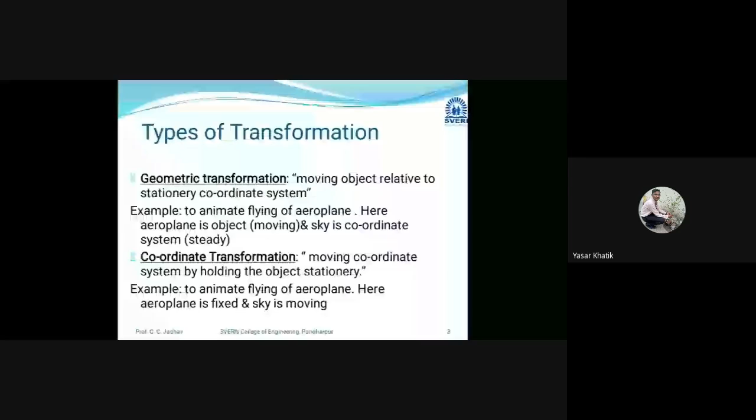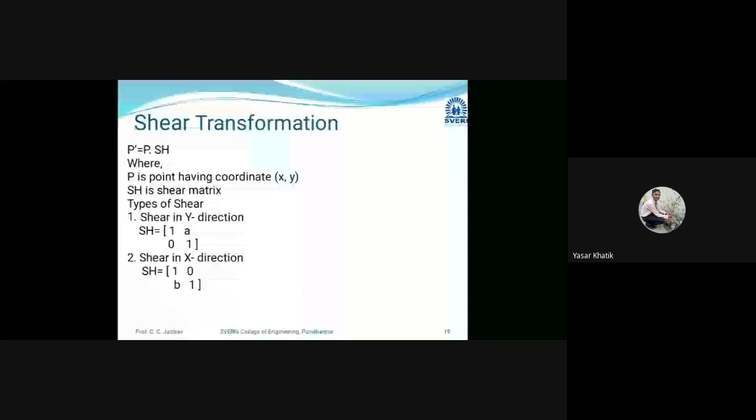So already we have covered the first part of the second chapter, that is the geometric transformation. In that we have seen the simple problem on the translation, rotation, mirror, scale. So already we have covered the second important part, that is the homogeneous coordinate transformation. And basically in university examination they will ask one definite fixed question on this point for 7 marks.

So we have already covered the homogeneous coordinate transformation, a theory part as well as a problematic part. So we have seen a simple problem as well as a homogeneous problem also. So if anyone is having any doubt regarding this problem, you can ask me anytime. You can call me, you can message me on the WhatsApp, so I will clear your doubts. Okay.

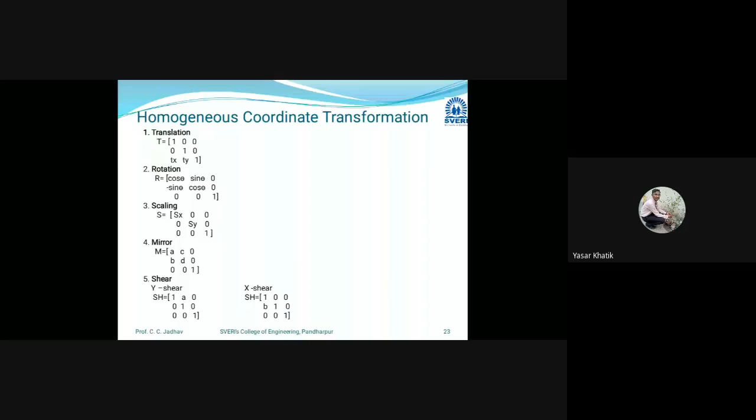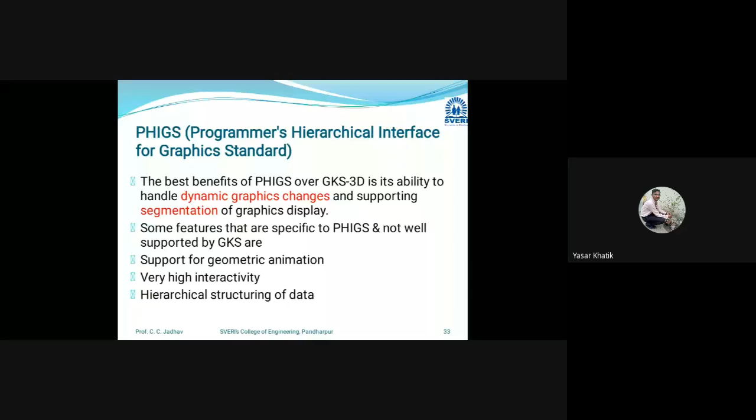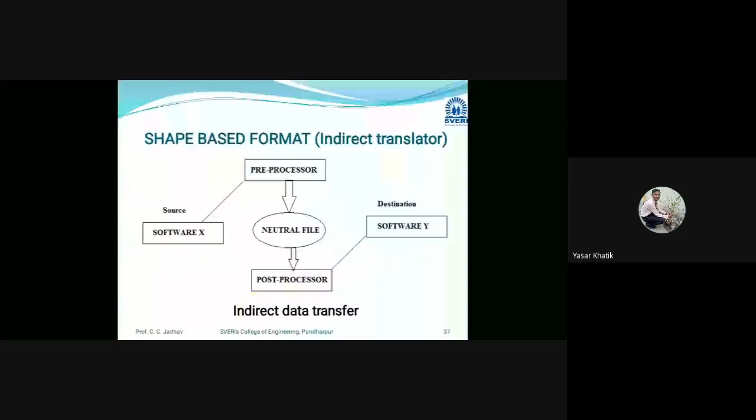Then we have seen windowing, viewing function, coordinate, then standardization. What are the functions of the graphic system? Then various graphic standards for this graphic system, GKS, PHIGS, IGES. Then last is data exchange with direct form and indirect form. So we will see next part. So that is our main second part of this chapter, that is an introduction to the geometric modeling.

Okay. So what is meant by geometric modeling? Might be everyone knows about the modeling. I think in second year you have learned the CATIA software. So everyone knows the meaning of the modeling. Modeling, in that we are going to create one of the product parts, like the prototype.

So earlier CAD systems, means far before our era, were basically automated drafting systems which displayed a two-dimensional representation of the object being designed. By using such a system, the drafting process could be accomplished in less time, and the productivity of the designer could be improved. Okay, so with the new CAD systems we are going to design a prototype model, and in that model we are going to create the drafting part.

We are going to achieve different parameters within less time by using this latest CAD system. Okay, but in the previous, old method for designing any product, they were using the old system. Here they were using a drafter, pencil, whatever instrument is there, and that instrument will take a long time for designing any product, and it is quite difficult to find out all the details of that model, as compared to our new CAD system.

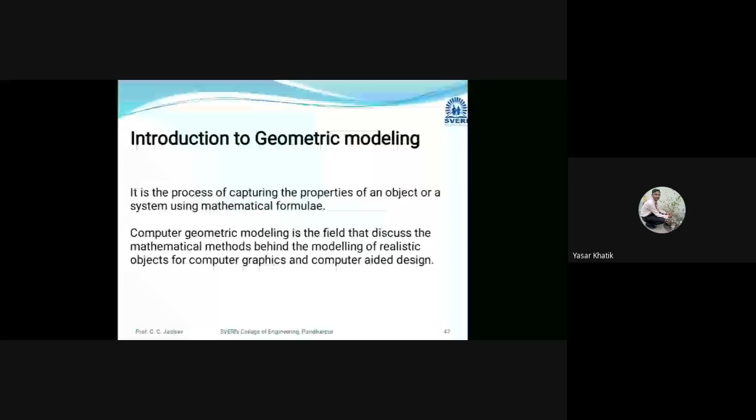We'll start with the first, that is wireframe modeling. Wireframe modeling is nothing but simple wire. Its name indicates wire; it is structured only like wire. It has no surface, no solid part. It is just a process of visualization of a three-dimensional part by using 3D computer graphics. We are not going to show any surface or volumetric area in this modeling. We view the skeleton and edge representation of the real-world 3D object using different elements: points, lines and curves.

So this is the basic type of modeling; here we are just showing the skeleton representation. This is the first type of modeling, wireframe modeling. Here we introduce vertices, which have some coordinates, and edges, which we call elements. Two vertices form a single element. Like this we form different vertices, and by using these vertices we create elements, that is, the edges. So we just show how the product will look in skeleton format.

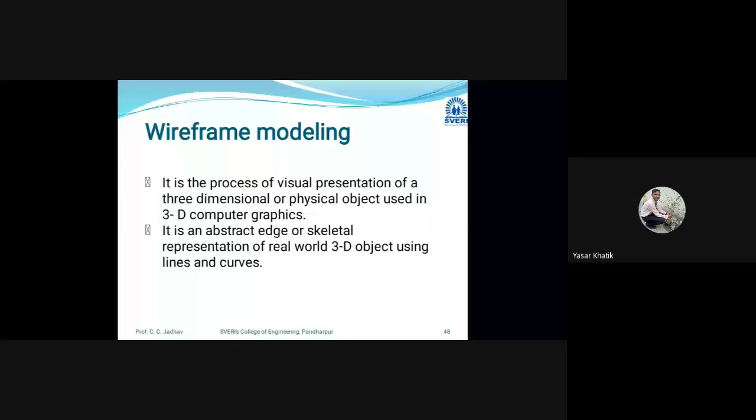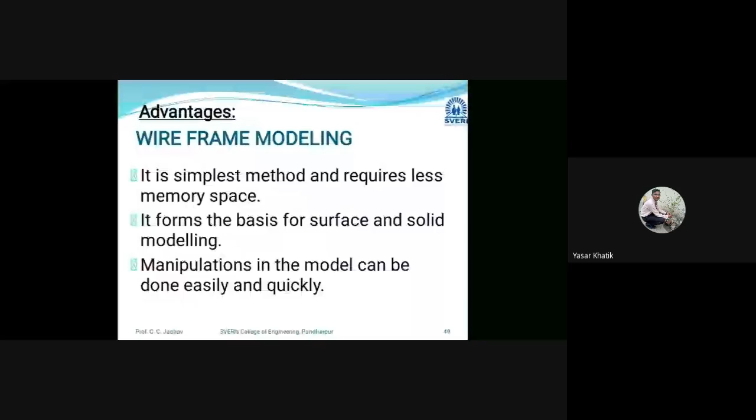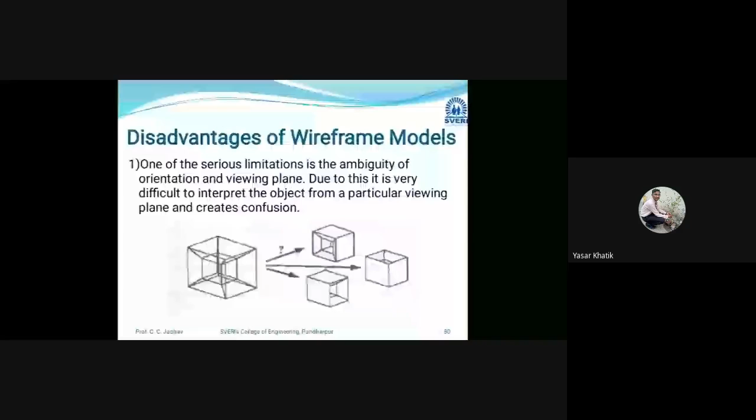It is the simplest method and it requires less data. It forms the basis for surface and solid modeling. If I want to do some modification or manipulation, it will be easy and quick. Those are the advantages of the wireframe model. There are some disadvantages, or drawbacks. We cannot set orientation as a point of view for the next drawing, so that is a limitation of wireframe.

Then, regarding information on surfaces: if I want to create some curves or entities at the nodes, at the surfaces, at the corners, that will be a critical task in wireframe. It is unable to calculate mass or physical quantities, and there are no surfaces, so at the time of assembly it will create some problems.

And as compared to solid and surface, wireframe requires a lot of data to create the construction model, it is not actually a solid part, and it is complex to draw. So this is about wireframe modeling, the first type of geometric modeling.

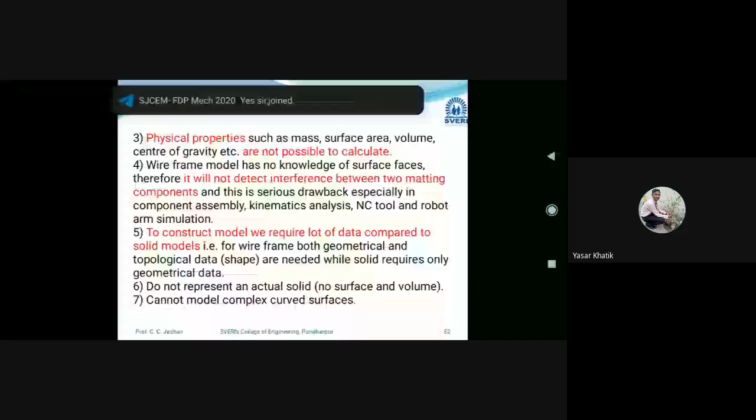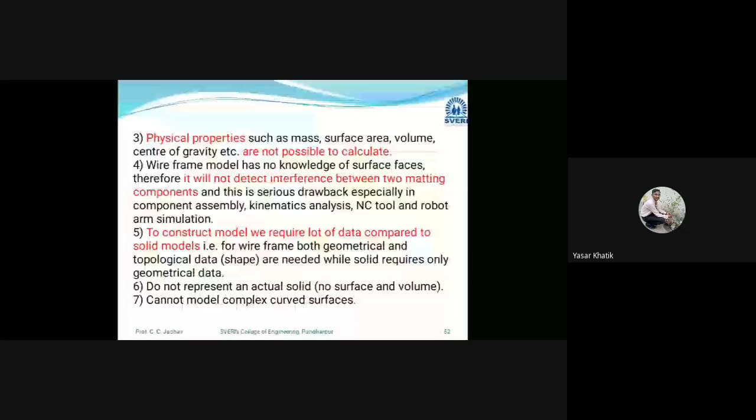The next type of geometric modeling is surface modeling. The name itself indicates surface modeling, so we are going to create a surface. In surface modeling, objects are defined by their boundary faces. Bounding faces means we join the vertices with edges and surfaces, so it will create a new surface.

So a surface model is a set of faces. We join the different faces with different edges and vertices, and that creates one entity. A surface model consists of wireframe entities that form the basis to create the surface entity. In the previous modeling, we have seen that we create only a wireframe model.

Okay, and by using that wireframe model, we are going to join only that particular face by using these vertices, and that will create our surface. So at the time of surface modeling, we are going to use the previous wireframe model. That will act as our basis, meaning our foundation for creating any surfaces. So the wireframe model is also important for drawing any surface model.

A surface model consists of wireframe entities that form the basis to create surface entities. In general, a wireframe model can be extracted from a surface model by deleting or blanking all surface entities.

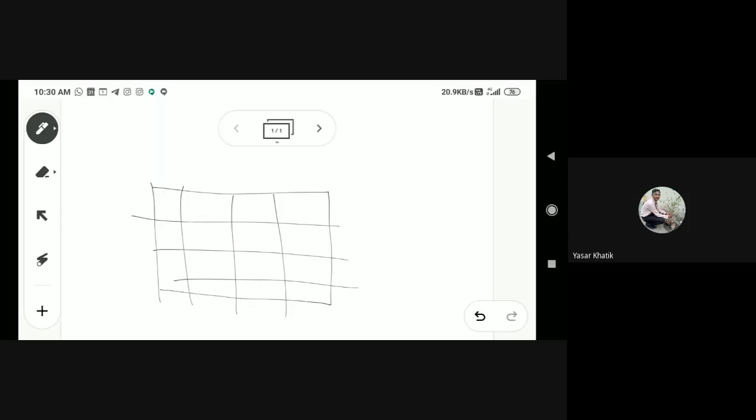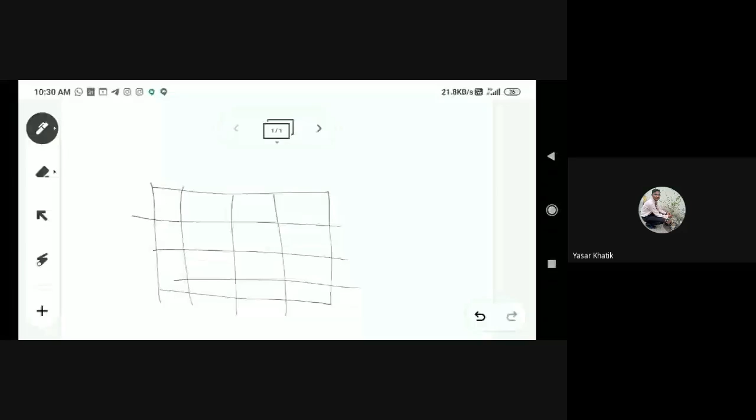I am going to divide this with a net-like structure. This is our plane structure. This is the simplest surface. It requires 3 non-coincident points to define an infinite plane. So here you require just the 3 non-coincident points, and you define the infinite plane. So this is the first type, that is the plane surface.

Next, the second surface is the ruled surface. A ruled surface is a linear surface. It interpolates linearly between two boundary curves that define the surface, and these can be any wireframe entity, and this entity is ideal to represent surfaces that do not have any twist or kinks.

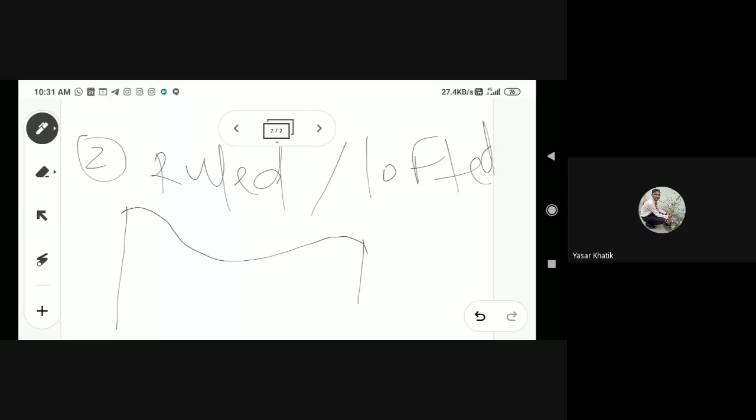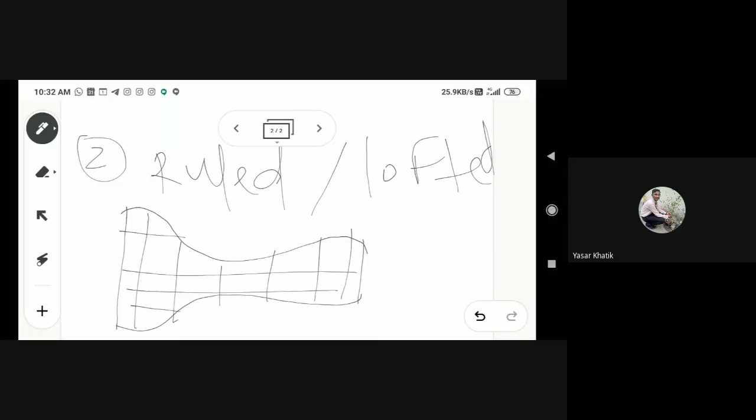So ruled means, suppose I have this one line and I have this second line. I want to create a surface with a ruled profile. The previous one is straight, a plane with only plane surfaces, but I want to create a ruled one, which we can call lofted. So like this, I am creating the ruled surface. Like this, we can create any ruled surface or lofted surface. You can name it ruled or lofted.

The third one is the surface of revolution. You might have studied this in CATIA software. Suppose I want to create one entity by using an axis. We just draw one axis, draw the symmetrical part along that axis, and then revolve it about this axis. Then you will get the whole geometry by using this command. This is called the surface of revolution.

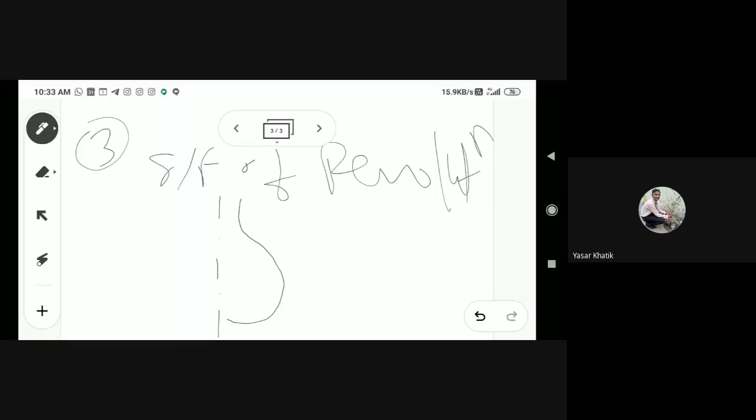Like this, I want to create one entity. Before that, I create one axis, and around this axis I am going to create one drawing. This is a planar curve. By using this entity, I am going to create one model, just like using the sweep command in CATIA. We select the axisymmetric surface around that axis, so it will revolve about that axis and create the geometry. So this is about the surface of revolution.

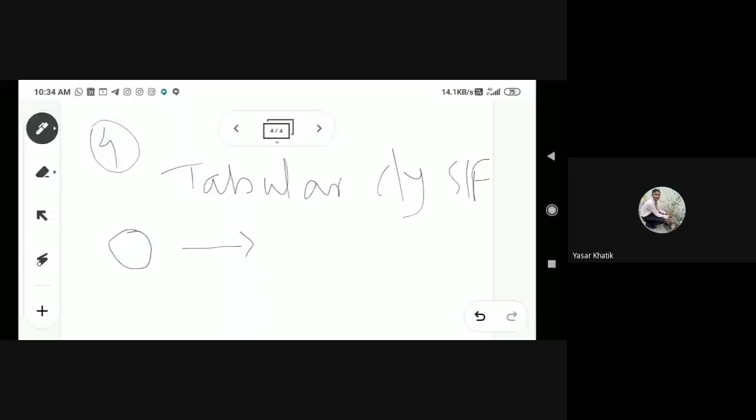The next surface, number 4, is called the tabulated cylinder surface. This is a surface generated by translating a planar curve a certain distance along a specified direction. It is a simple type of surface where, suppose I take this circle and want to create a cylindrical part from it, you can use the tabulated cylinder surface. You can extend that circular part with this command and create a cylinder. So from this circle I am going to create one tabulated cylinder like this.

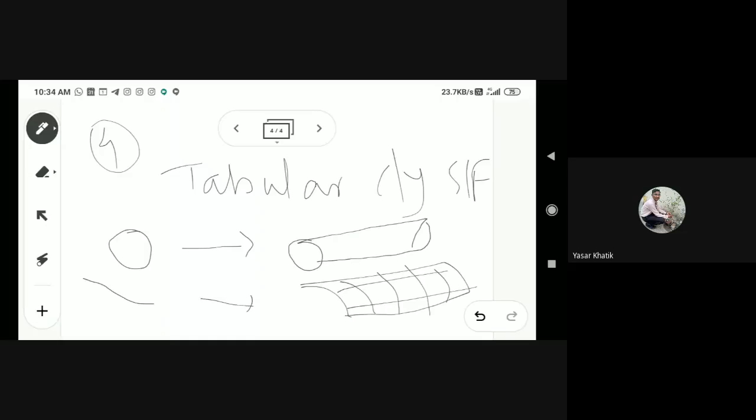So this is the tabulated cylinder surface. Next, suppose this is one line and I want to create a tabulated one. You can just create a surface like this. So this is the example of the fourth type of surface, the tabulated cylinder surface. Then next, the fifth is called the Bezier surface.

Okay, so this is the surface that approximates given input data.

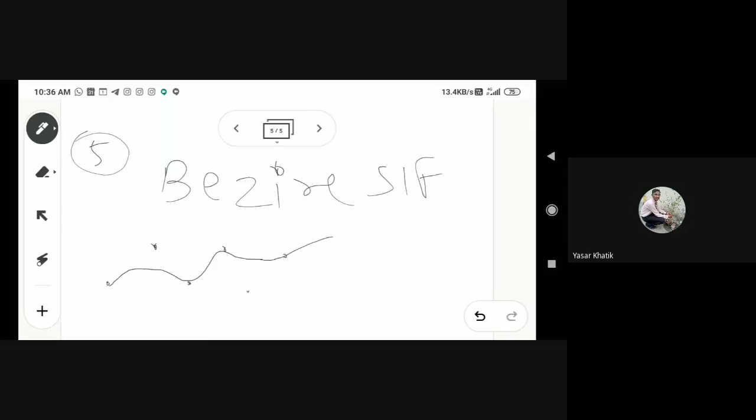Okay, so the next surface is B-spline surfaces, number 6, B-spline surface. So this is the surface that can approximate or interpolate given point data. It is a synthetic surface. It is a general surface like a Bezier surface, but permitting local control of the surfaces. Okay, so in the previous surfaces, that is the Bezier surfaces, there is no local control, only the global control is there. But in this B-spline surface, local control is permitted.

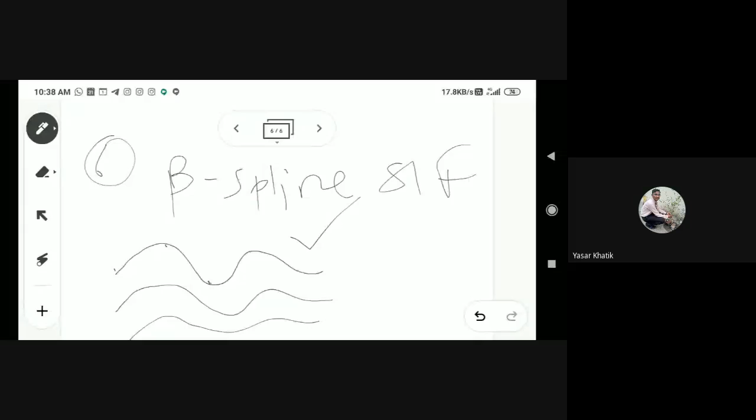Okay, so local control and global, I will show the example. So suppose these are some points, and this is the curve passing through these points. Okay, that is called the B-spline surface. Okay, so this is the B-spline curve. Suppose I want to change the nature of the curve for this first B-spline surface. Suppose this is your previous B-spline curve, and I want to change it. Like this, I will take the same points.

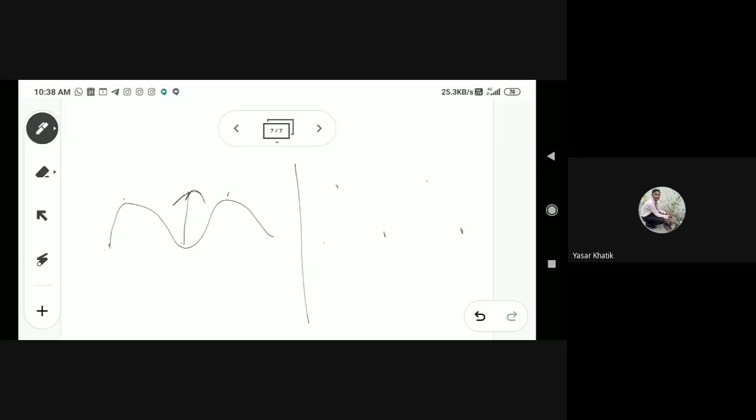I want to change this point to this location. Okay, I will drag this curve to the upper side by using local control. So this point is called a control point. This point is called control point P1, P2, P3, P4, and P5. So generally we call it a local control point. So in B-spline surfaces, we can easily control the local points. With the help of that local point, we can create or change the nature of the curve.

Okay, and then I want to change the nature of that curve at point 3. So look, I will create a curve with a new point. So this is your P1, P2, P3, P4, and P5. So I want to change our curve nature at point P3 by using local control point P3. Okay, so that will be permitted in the B-spline surfaces, but in the previous Bezier curve, that is not permitted. Okay, so this is the difference between Bezier surfaces and B-spline surfaces.

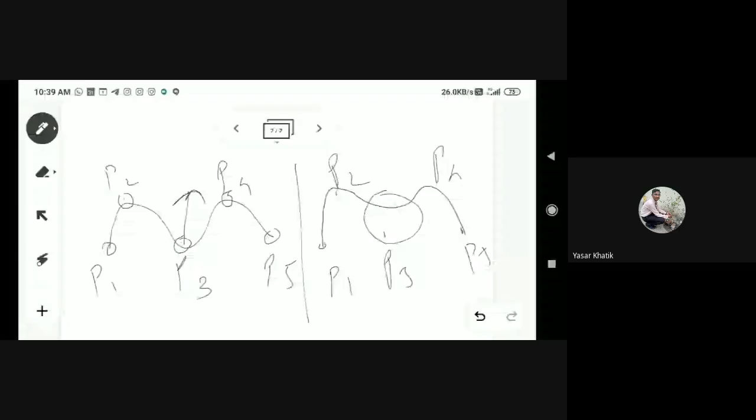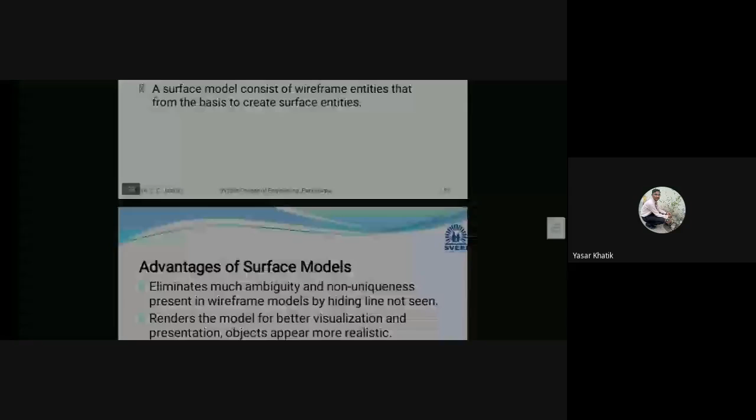Okay, so these are the types of surface modeling. So for surface modeling, we will go to our PPT. Okay, so we have seen the types of surface modeling. So what are the advantages of the surface model? So basically surface models eliminate much ambiguity and non-uniqueness present in the wireframe model by hiding the lines not seen. Okay, so whatever the drawbacks, the ambiguity, the difficulties in a wireframe model, we are going to eliminate them in the surface models.

Okay, so it renders the model for better visualization. Render is one of the tools for improving the surface finishing or visualization in the modeling. And presentation objects appear more realistic. So by using the wireframe model as a foundation, we are going to create surfaces. So for better visualization, we are going to apply some rendering surface finishing on those surfaces, so that the object looks like a realistic product in terms of the surface modeling.

So it provides the surface geometry for computer aided manufacturing. So in CAM we are going to create an actual product, so they provide the surface geometry for CAM for manufacturing purposes.

NC, that is numerical control machines for further production. So it is quite a good point related to direct production. There is no other CAD system procedure required for that particular part, for further manufacturing.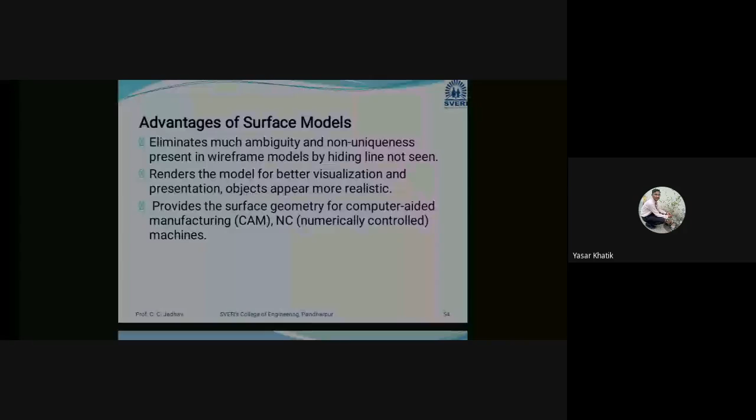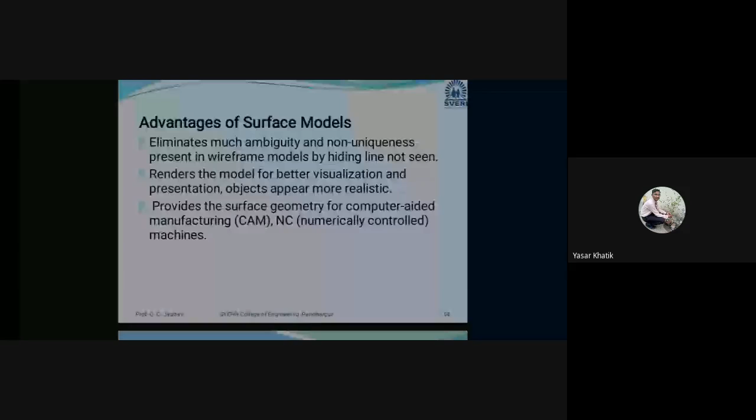In surface modeling, we eliminate the drawbacks in wireframe - that is its most important advantage. By using surface modeling rendering, we show better visualization of the product object. It looks realistic, and it is quite easy to give that surface geometry direct to CAM and NC machines for the next process. So those are the advantages of the surface modeling part.

It provides the geometry needed by the manufacturing engineer for mold and die design. So whatever the design engineer or manufacturing engineer needs for further production, it will be needed for making the die design mold for that particular product. So that is also a benefit.

It can be used to design and analyze complex free-formed surfaces of ship hulls, airplanes, fuselages, and car bodies. Whatever complex geometry is present in airplanes, fuselages, car bodies, ships - that complex design and analysis will be created and analyzed in surface modeling using various surfaces. We have already seen different types of surfaces like plane surfaces, ruled surfaces, tabulated, Bezier, B-spline - different surfaces used for complex geometry, making it easier to create different parts. So that is also a benefit.

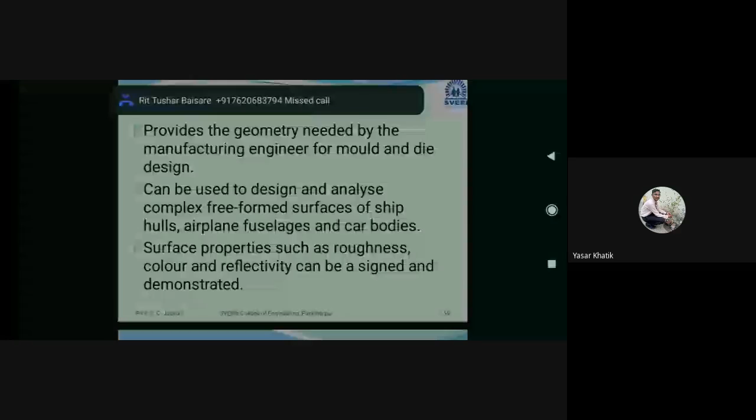Surface properties such as roughness, color, reflectivity can be assigned and demonstrated. Surface has a lot of properties. First is roughness, meaning we present the surface of the particular part with a certain grade - we have already studied this in machine drawing. There is color, reflectivity, and many other parameters to show that surface, and these will also be demonstrated using this surface modeling.

Then there are some disadvantages regarding surface modeling. It provides no information about the inside of the object. In the previous wireframe model, we saw there is no physical data in terms of area, mass, volume, or any properties information - they are not stored because it is only a construction model. In surface modeling, we create a surface by vertices and edges, but inside the part there is no object - there is no information regarding that particular part. By using this surface model, we create only surfaces, and inside these surfaces there is no information about that particular model. So that is a drawback.

For curved surfaces, a fine mesh is needed to be accurate. Whatever curved structure or complex geometry is there, a fine mesh is required for accuracy and better results. If we create a coarse mesh, mesh quality is poor, and if we create a fine mesh, by default the computer system requires large memory and more computational time, which indicates lower productivity of the company. So it is quite difficult to create curved surfaces, and for that we need to make a fine mesh.

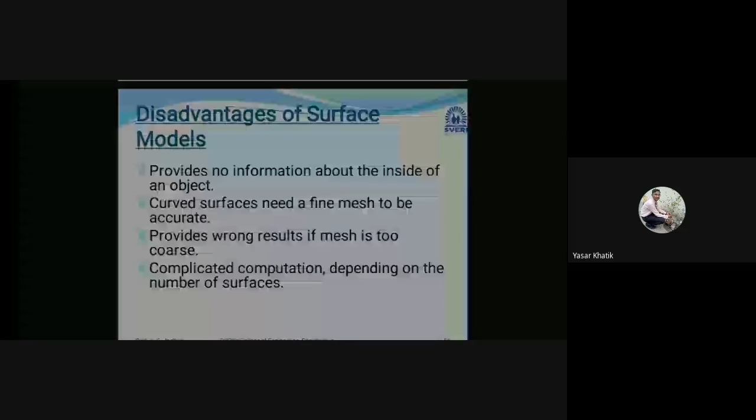Next, whatever we have already seen, the different surfaces are there, like plane surfaces, ruled surfaces, sphere, cone, tabulated, bezier, B-spline, Gordon, NURBS. So these are some types of surfaces: analytical surfaces and synthetic surfaces. Bezier surfaces, B-spline, NURBS, that is categorized into synthetic surfaces. We will see the details of curves in the last point of this chapter. This is only the introduction part of surfaces.

Here we are going to use different types of surfaces. Whatever complex geometry is there, for that purpose we are going to use these curves for a better product. So we can easily construct complex geometry by using these synthetic surfaces and analytical surfaces. So this is the point about the kinds of surfaces.

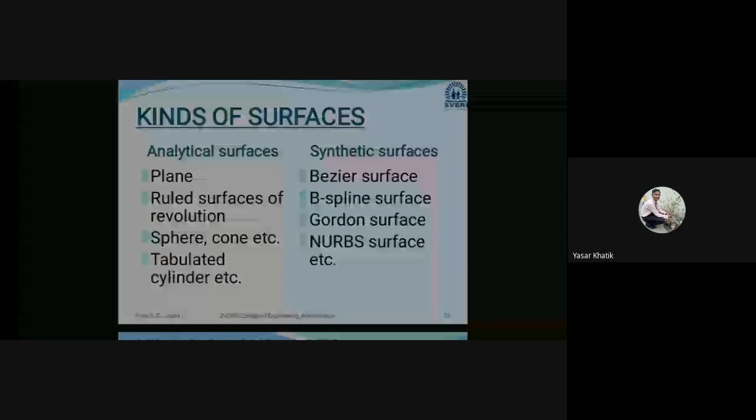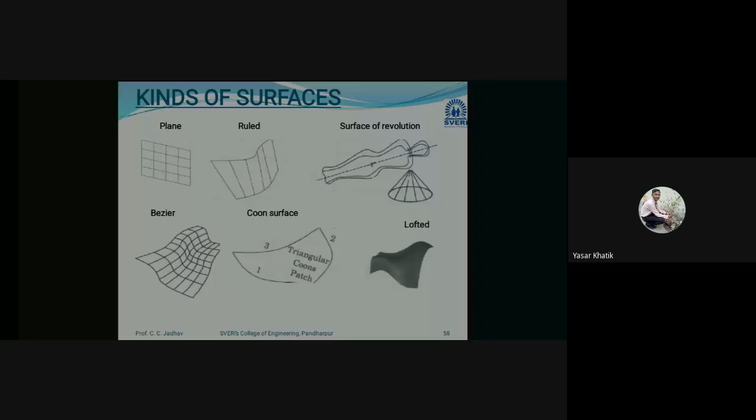Now, as already shown, plane surfaces, ruled surfaces, then surface of revolution - how we are going to create a geometry by using the axis. About that axis we create a symmetrical part of that geometry, and then we revolve about that axis and get a geometry. Then Bezier curve, Coons surfaces, lofted surfaces.

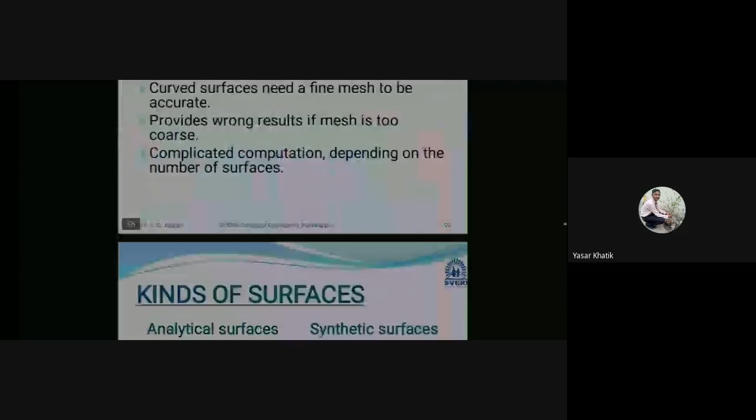So if you have any doubt regarding surface modeling, you can ask me, if you do not understand what surface modeling is.

Previously we have seen wireframe modeling, now we have seen surface modeling. In wireframe modeling, we are unable to store physical data in terms of mass, volume, area. So in surface modeling we are going to eliminate that previous drawback of the wireframe model.

We have created surfaces by using the vertices and edges in surface modeling. But in surface modeling, one major disadvantage is that inside these surfaces there is no information regarding that particular object. So that is the major disadvantage of surface modeling.

But one good advantage of surface modeling is we can create any complex part of the geometry by using analytical and synthetic curves, and that will represent that entity. Using rendering tools, you can create a physical visualization for that particular part, and we will get a better visualization, like an aesthetic look and ergonomic look, so the customer will buy our product. So that is the advantages and disadvantages of surface modeling.

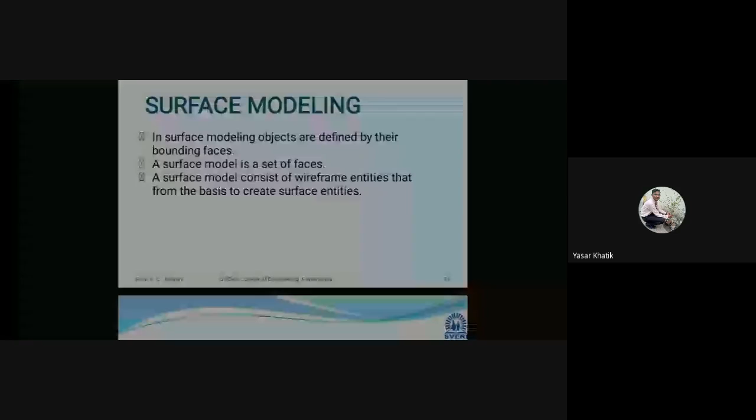We have seen the types of surfaces - plane, ruled, sphere. For that particular condition we have to use these different analytical surfaces as well as synthetic surfaces. If our geometry is complex, then we are going to use synthetic surfaces. So like this, we have seen surface modeling.

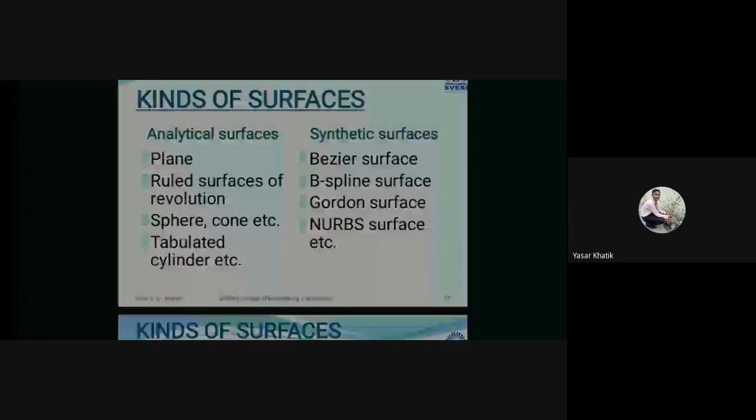So the next part of this geometric modeling is solid modeling. We have seen wireframe modeling, then surface modeling, and last one is solid modeling. First we create a wireframe model, and by using this wireframe modeling we can easily form a surface using different vertices. And last, using different surfaces, we create a whole solid part of that particular model.

So solid model is nothing but a solid definition that eliminates all kinds of ambiguity, whatever difficulties or drawbacks we faced in wireframe model and surface model. Those difficulties, that ambiguity, we are going to eliminate in this solid model.

In representing objects, the solid modeler was developed. Out of the various approaches developed, one of them was an approach to design mechanical parts by treating them as a combination of simple building blocks like cylinders, cubes, cones. So whatever drawbacks we faced in wireframe and surface modeling are eliminated in solid modeling. We create a simple solid by using a combination of blocks like cylinders, and you might remember in CAD software and CATIA software there is one option called primitives, a toolbar.

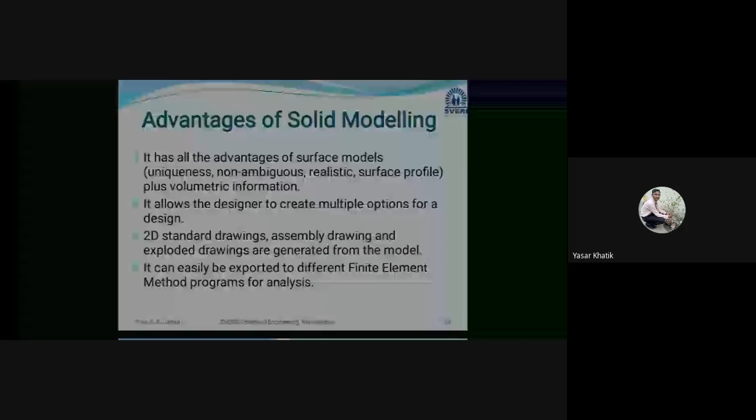Next, it can be used in newly developed manufacturing techniques, like computer integrated manufacturing, computer aided manufacturing, and design for manufacturability. Whatever new techniques are coming for manufacturing purposes, we can easily use this solid model part for our new techniques, importing it directly into the CAM system.

Here we are going to integrate all the departments at a single point, meaning CAD department, CAM department, and CAE department, and we are going to carry out the production of that particular part using these different departments at a single point. That is called concurrent engineering.

So you might be studying in first year in mechanics. What is meant by concurrent forces? All forces coming at a single point. Like this, we are going to create a model, create a particular part using the CIM manufacturing technology, that is, computer integrated manufacturing. Here we allow all departments to come together at a single point. That will save our time as well as increase our productivity. So CIM is important for a particular model.

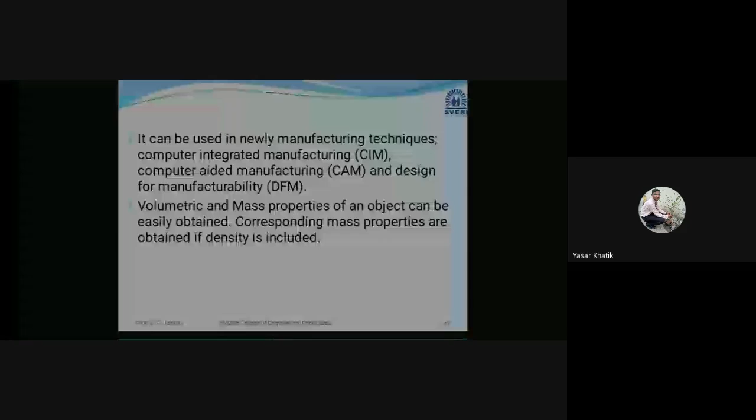Now we will see some disadvantages of solid modeling. First, it is more intensive computation than wireframe and surface modeling. Of course, in solid modeling there is a lot of data for that particular model, so it will take more computational time during analysis compared to the surface and wireframe models.

In wireframe there are only edges, lines, and curves. In surface modeling only the surface is there, but in solid modeling there are lines, vertices, surfaces, the solid part, then the physical properties of that particular model. So that will take a huge computational time. That is the main disadvantage of any solid modeling analysis. But it will give better accuracy compared to the wireframe and surface models.

The second thing is it requires more powerful computers, faster and with more memory, for the analysis.

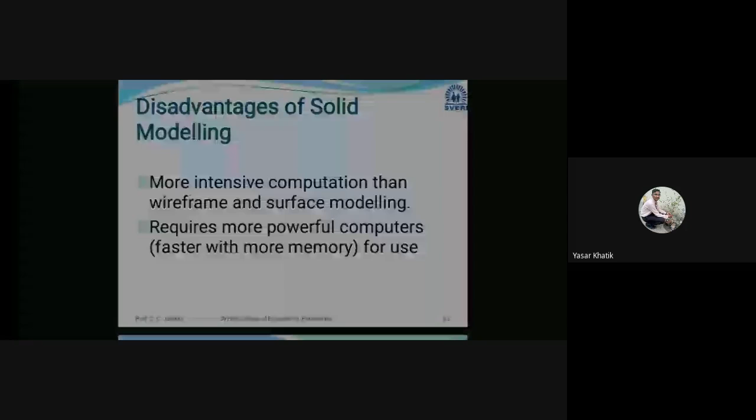So the next point is a differentiation of these three models: wireframe, surface, and solid. Whatever we have studied up till now: what is meant by modeling, geometric modeling, and its three types, wireframe, surface, solid. What is the use of wireframe? What is the use of surface and solid modeling? What are the advantages and disadvantages of each? On this single slide, we will conclude these three models.

Okay, so I'll just ensure. Hello, Aniket. Yeah, sir.

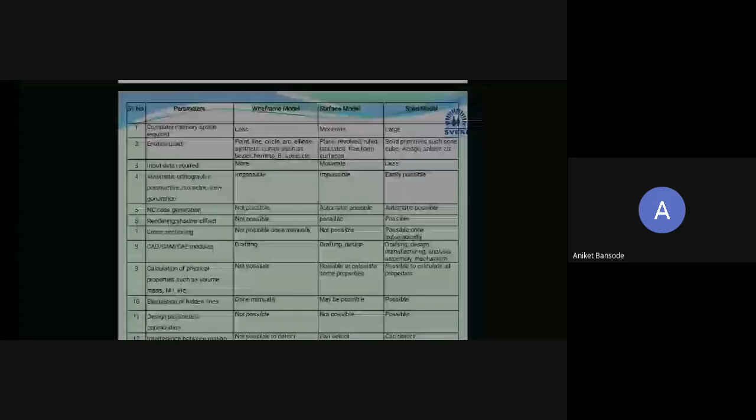Next is the entities used. In the wireframe model, the entities we use are point, line, circle, ellipse, and synthetic curves such as Bezier, Hermite, and B-spline. Those are the entities for drawing a wireframe model.

In the surface model, we have already seen the types of surfaces: plane, ruled, revolved, tabulated, free-form surfaces, and synthetic curves like B-spline and Bezier. Okay, and the solid model.

So directly we are going to use primitives, and that is the one thing. Then you can use the wedge, sphere, cubes. Okay, and then you can use various tools; you can use here a line also, a point also, and from that line and point you can create any solid part. That is also possible, but that will take a long time.

Okay. Third parameter, that is the input data required. So for a wireframe, we require a large amount of data for creating the wireframe, every vertex, every edge's information. So as compared to surface and solid model, we require huge input data in the wireframe model, moderate in surface, and less for solid.

Automatic orthographic, perspective, isometric view generation. That is the next parameter. In wireframe, it is impossible to create these views. In surface model also it is impossible, but in solid model you can easily create them by using the views command. You can create any views.

So for a representation of any solid model, there are some schemes. First is CSG, that is constructive solid geometry, the solid primitives combined with Boolean operations. Means we are going to combine the cone, sphere, with the Boolean operations, means addition, subtraction, like this. This is the first type of representation.

Second, boundary representation, that is B-rep, that means bounding faces, edges and vertices. And third is cell decomposition, means we are going to add some part of the component model with the other part, that is variable spatial cells. In that there are two types: spatial occupancy enumeration, that means model of fixed size, and next octree encoding.

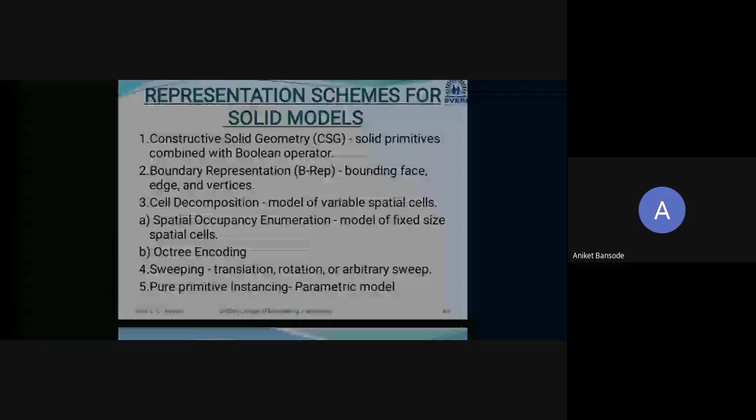And fourth one is sweeping, like translation, rotation, and arbitrary sweep. You can sweep in terms of global coordinates. And last one is pure primitive instancing, parametric model. So these are some schemes for representing the solid model. We are not going to see all of this, just 2 or 3 parts. So we'll start from the first, that is the constructive solid geometry scheme.

Now you can see some examples of the basic primitives for solid modeling. In primitives or entities, there are some ready-made models, like box, cylinder, cone, wedge, sphere, and torus. You just have to select any required entity and place it on the plane, and that will create the geometry according to your dimensions. So this is the first type, constructive solid geometry.

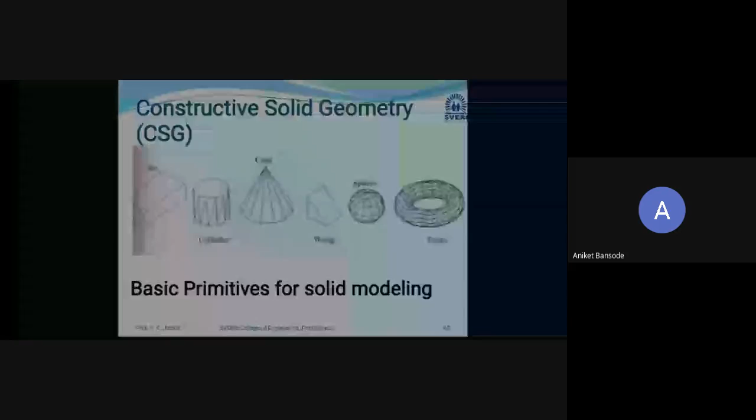Next, for constructive solid geometry, there are some Boolean operations. The first Boolean operation is union. Union means we are going to add the surfaces to each other. In that we sum up all points in each of the two defined sets. That is a logical operation, also referred to as add, combine, join, and merge.

Already you might know in CAD there is a union option, join, and cut also. So there are two entities. You can see one square box, select A and B, and there is a union operation, A union B. So we will get our required geometry by using this Boolean operation. So this is the first, union.

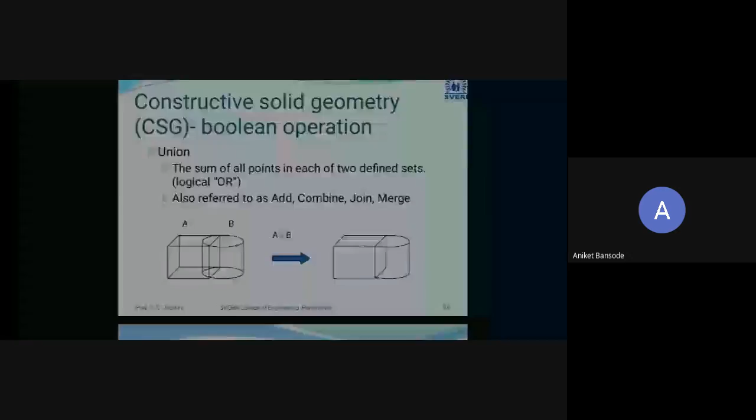And the third operation is intersection, means common and conjoin. Whatever the combined part of these two entities is, that is our solution of this Boolean operation. So those points common to each of the two defined sets. The sets must share a common volume.

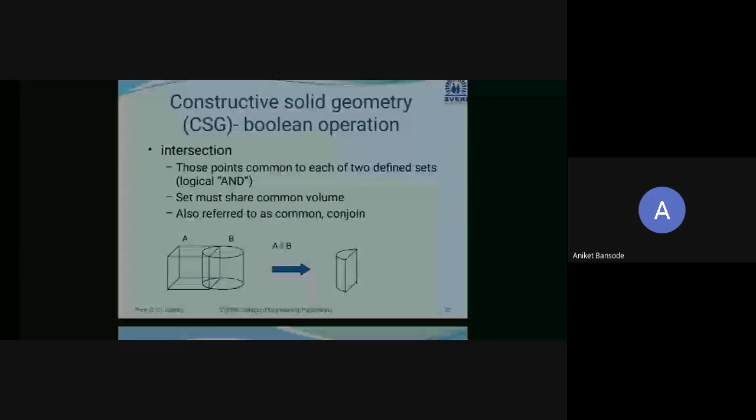And it is also referred to as common, conjoin Boolean operation. You can call it common and intersection. So this is about constructive solid geometry and the Boolean operations. So next part is Boolean operation. Using Boolean operations, be careful to avoid situations that do not result in a valid solid.

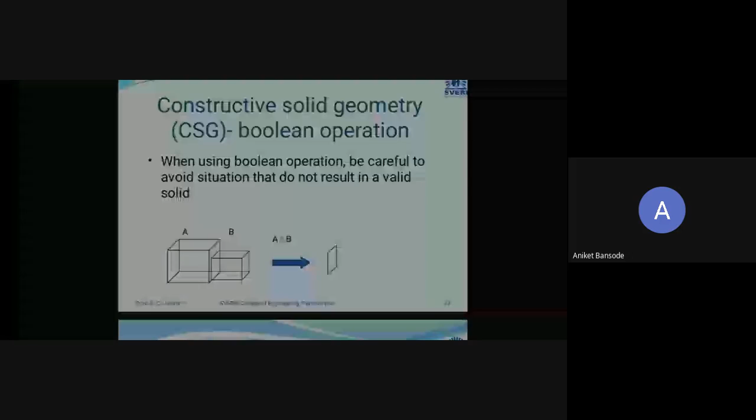Then next, these are the Boolean operation results. First of all is union, if you want to add any other entity to a different entity, then subtraction, then intersection. Okay, so this is the example of the three types of Boolean operation: union, subtraction, and intersection. Okay.

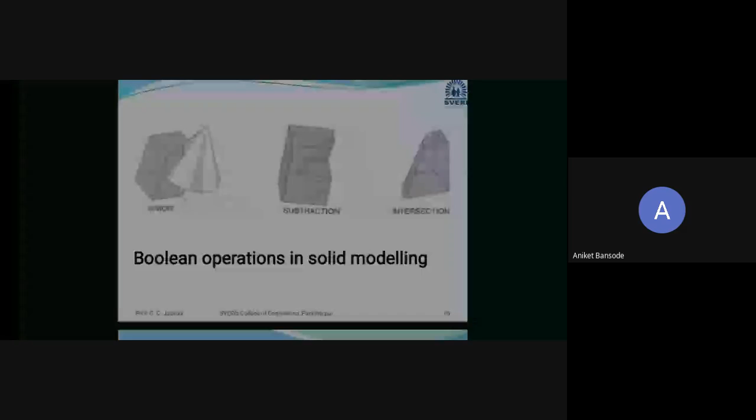Now you can observe there are so many parts here we are combining, joining, union, whatever Boolean operation is there. We are using the different Boolean operations and we are forming a required part. Okay, so like this we have to do different operations and then we will get the required part.

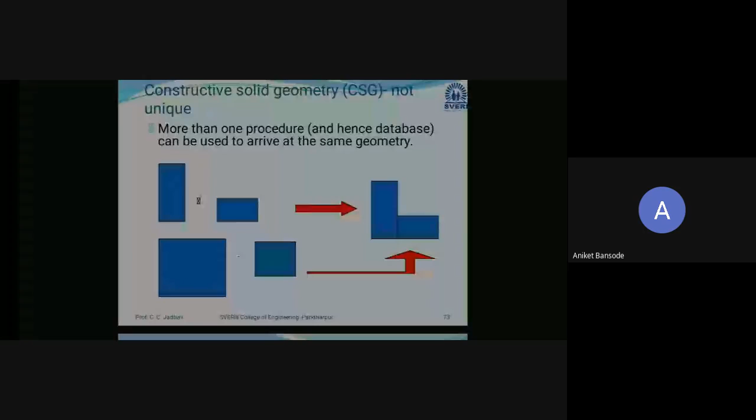Then you can see here, this is the second example. Here different parts are there, and from the different parts we are going to create a geometry. Okay, so more than one procedure and hence database can be used to arrive at the same geometry.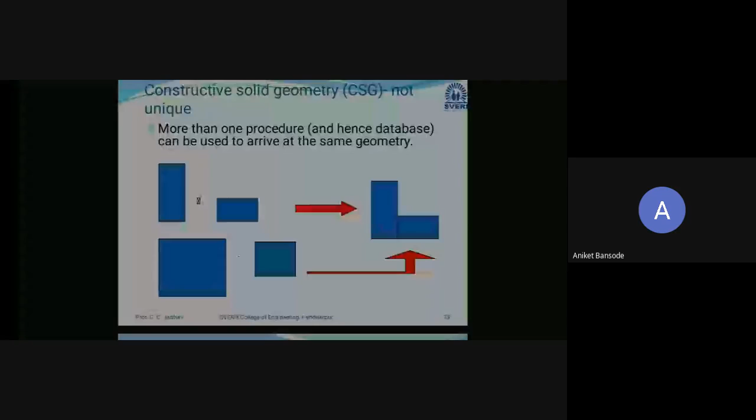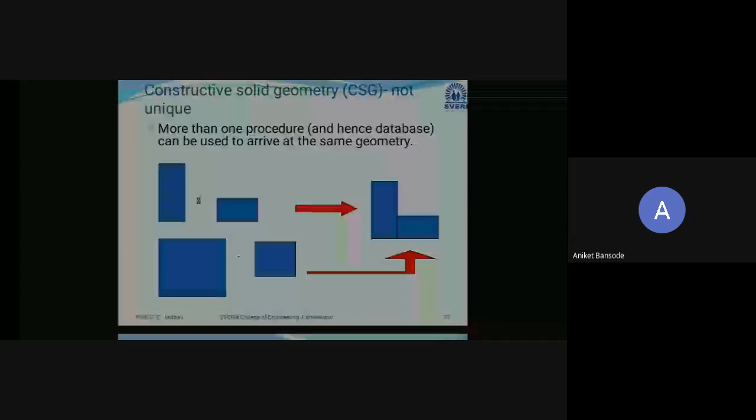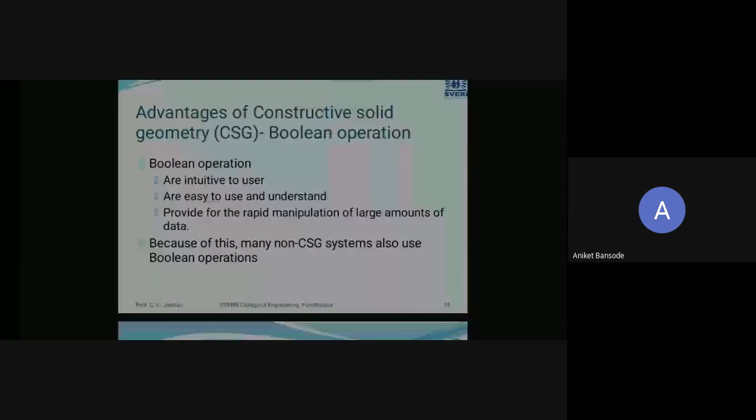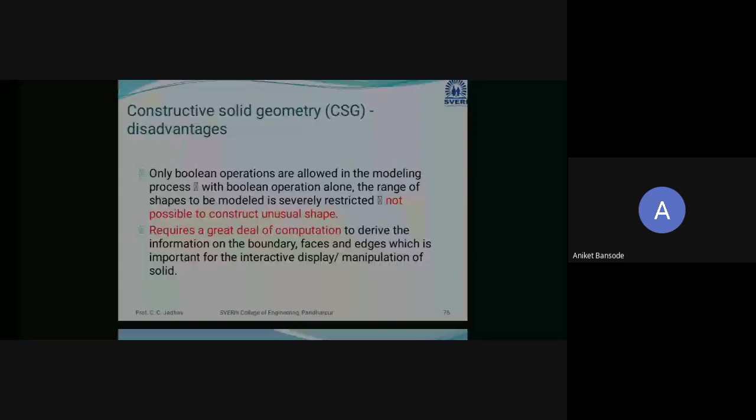So there are some disadvantages of CSG. Only Boolean operations are allowed in modeling processes. With the Boolean operation alone, the range of shapes to be modeled is severely restricted; it's not possible to construct unusual shapes.

Previously we have seen that there are some primitive shapes like sphere, cone, circle, cylinder, like this. Only a few primitives are there. Other than these, if you want to create any shapes, that is quite difficult or not possible to construct.

Okay, so those are the main disadvantages. It requires a great deal of computation to derive the information of the boundary, faces, and edges, which is important for the interactive display and manipulation of the solid. In solid modeling, if you want to create a geometry by using constructive solid geometry, it requires a great computation to achieve the information at the location of the boundary, faces of that model, and edges. That is quite a difficult part in this CSG.

So it is important for the interaction between user and the display at the time of designing the model, at the time of analyzing that model. The user should be able to see each and every detail of that model in terms of the edges, faces, and boundary information. That will be required for further analysis. So those are the disadvantages of this CSG.

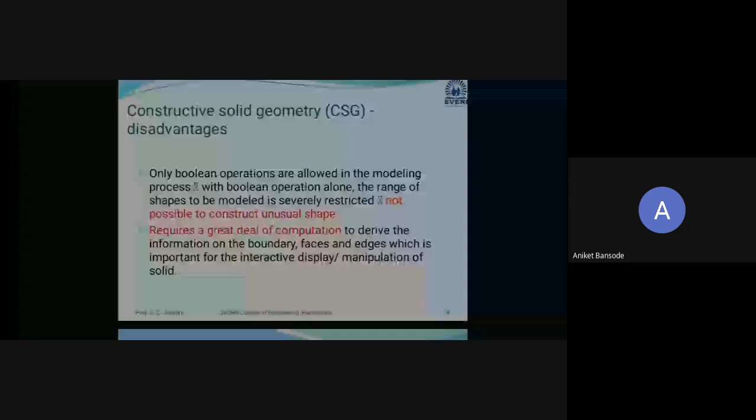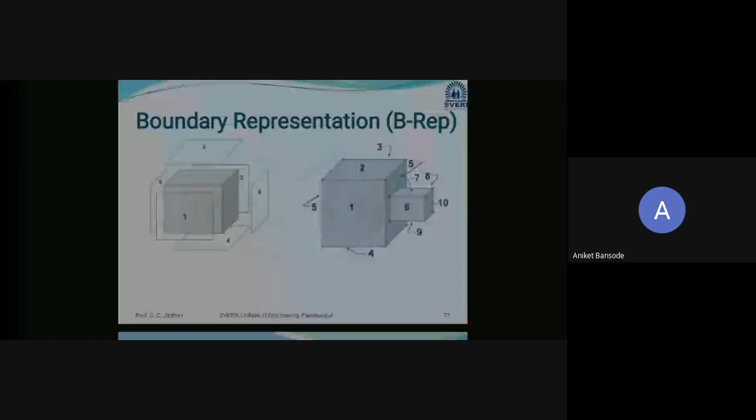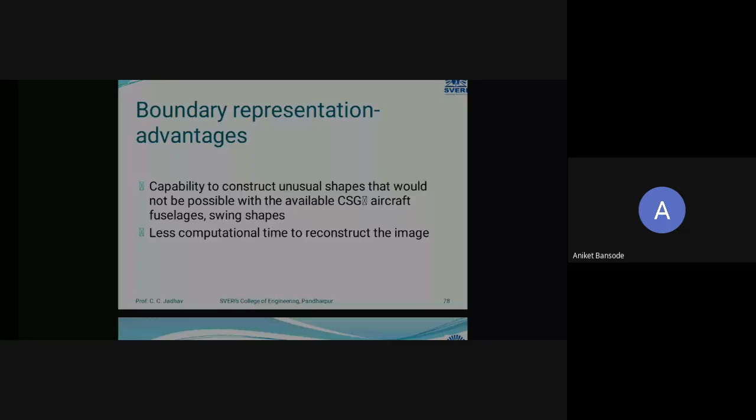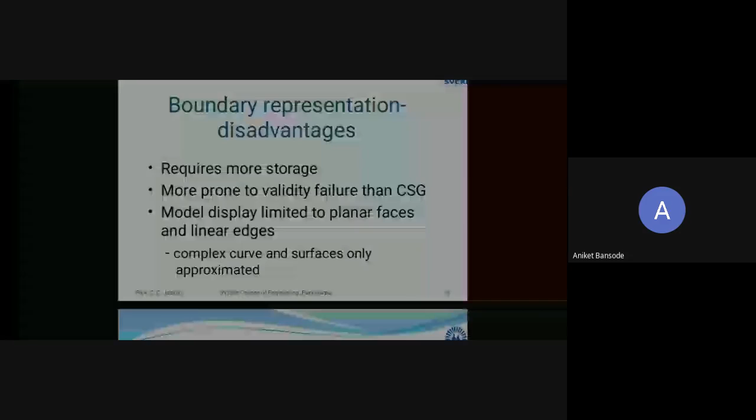In these schemes, we just have to focus on how to draw any solid model in less time and accurately. There are some advantages and some disadvantages of each scheme. Next is cell decomposition. This is only for information: how we decompose a particular model into cells.

If I am interested only in cell number 3, then I will go only for that cell. Why should I focus on the remaining cells? This way we save time, improve productivity, and it leads to greater overall productivity. This is the scheme we use for solid modeling.

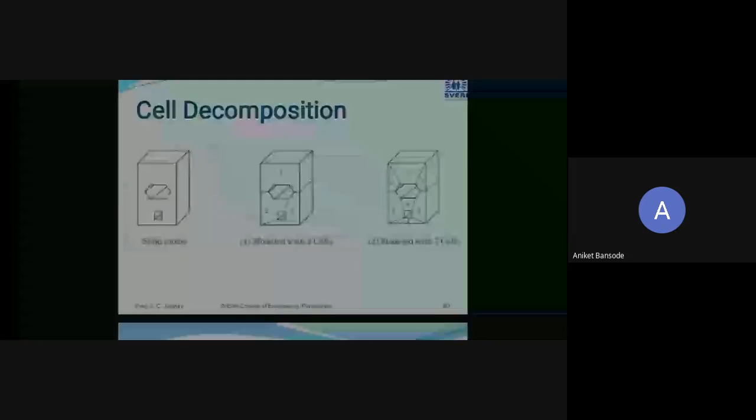Next, spatial occupancy enumeration. Here we divide the particular model into n number of parts, like meshing, and that is provided for the process. This is only for your information, this type of scheme is not asked in the exam, this is just so you know how we use different types of solid geometry schemes.

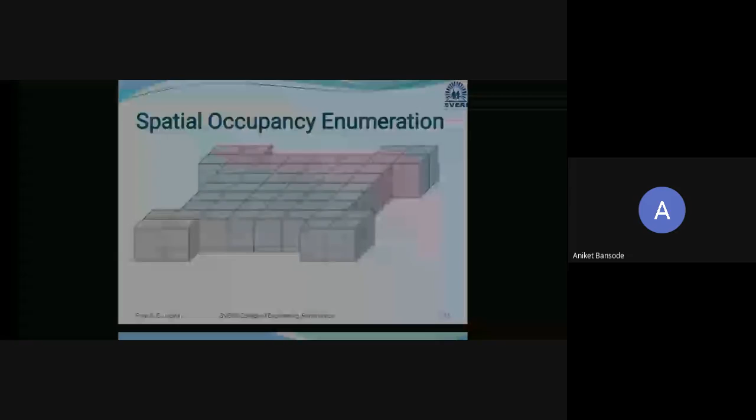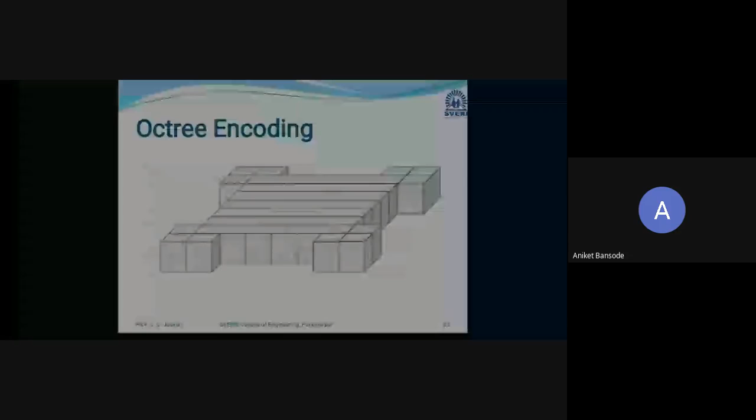I just want you to know this. Next is octree encoding. There is a difference in structuring for this technique. They create only lines, not small elements, in octree encoding. This is the third type of solid geometry scheme.

Next, sweeping, which we already know. Suppose I want to create a solid geometry using the sweeping command. You just have to draw along one axis, and by drawing along that axis you create the solid part using this sweeping command. This is very easy for drawing any solid part, so this is an easy solid scheme.

Next is pure primitive instancing. This is similar to the job work you did in the workshop last semester on metal parts, where there are operations like grooving, facing, milling, and so on. In pure primitive instancing, whatever dimension, allowance, or surface finishing is required all comes under surface modeling. That type of modeling is done in machining like CNC and VMC. This is how we create the solid model.

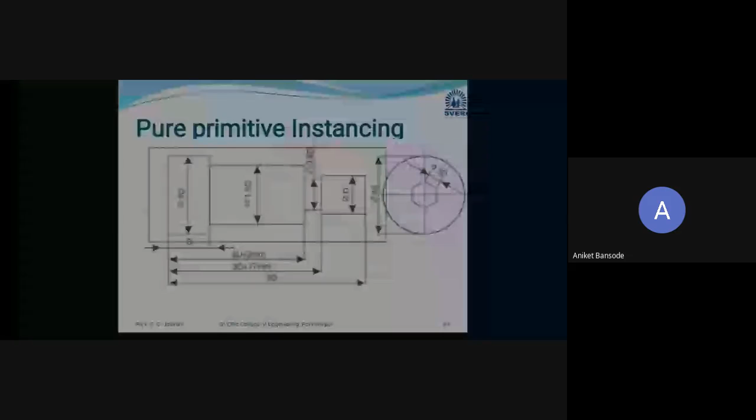Next is applications of solid modeling. What are the applications where we can use solid modeling? First is graphics, design, manufacturing, and assembly. At the time of assembly and manufacturing, there is a requirement for the functional part, so solid modeling is applicable there. There are different sectors where we use solid modeling, such as design and graphics sections. There are a number of parameters where we can use solid modeling.

So today we have seen so many theory parts, so today we will stop here. Just memorize what we have studied in today's lecture, and we will stop here.